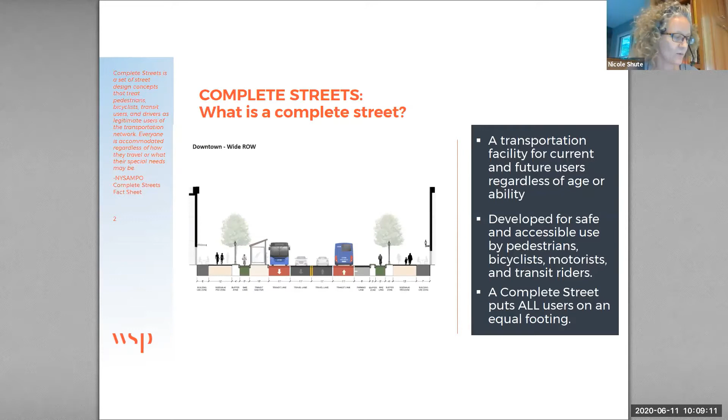So when did all this happen? Much of our recent engineering design practices has focused on the automobile. Complete Streets looks to put a higher emphasis on other modes of travel, particularly pedestrians and bicyclists, but also connectivity and access to mass transit users.

A quick Wikipedia search revealed that Oregon, go figure, enacted the first Complete Streets-like policy back in 1971. It sort of makes sense because we have long relied on the automobile, but in recent years the love of the car seems to have diminished somewhat.

Governor Cuomo signed the Complete Streets Act in August of 2011. It went into effect in February of 2012. Two years later, DOT issued the Complete Streets report, which synthesizes all the information they collected during their public outreach. It gives a reference to best practices, lists the design guidelines published through their DOT manuals, and gives a best practices outline.

Since this act was put into place, nearly 150 municipalities - towns, villages, cities - have gotten resolutions for incorporating Complete Streets policies into their projects, and 15 counties in New York State as well.

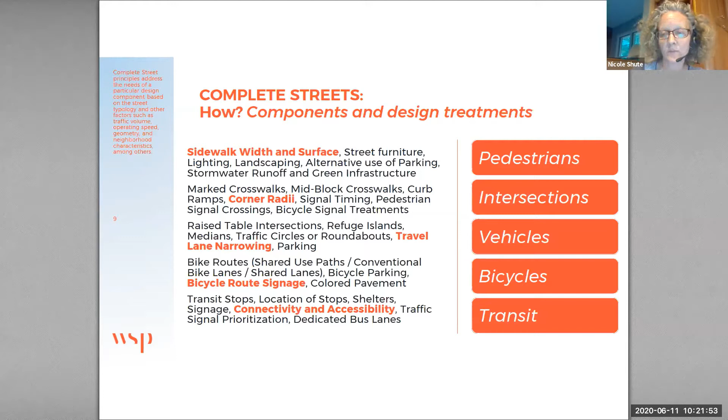For mass transit options, most of the design features have to do with amenities and the locations of the stops. Make sure they're in a location where users are available, and that the amenities provide an attractive space for users to wait for a bus or light rail. Connectivity is important across all components of a complete streets design. Dedicated bus lanes and signal prioritization also promote usage of mass transit through a quicker ride from point A to point B. So here are some project examples that WSP has worked on, or that I specifically have worked on.

Not to say this is a competing planning organization, but WSP Planning did work extensively with the City of Albany on the preparation of the Complete Streets Policy and Design Manual. This manual was developed to codify, to put into words, the design concepts for complete streets, and helps each municipality and project determine which concepts can be incorporated appropriately into their designs.

WSP was in charge of developing some street typologies and other concept designs. Once you take these typologies, which are a further description of a functional classification involving context, you can, based on geometry, speed, or neighborhood, apply one of the typologies to your project and select which complete streets aspects you can incorporate.

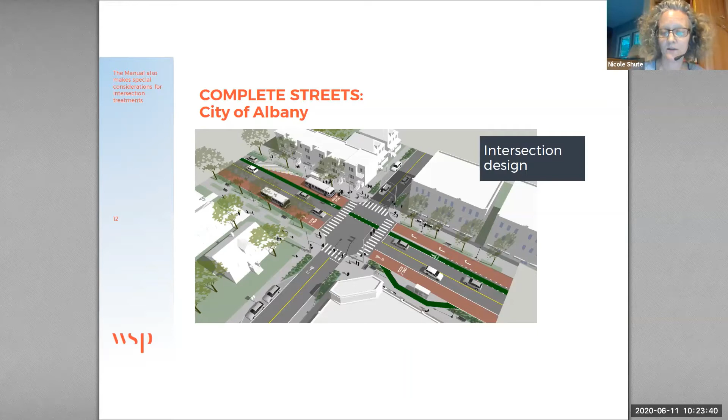WSP also assisted with the layout of some intersection design best policies. This particular slide depicts an intersection with a high bicycling and transit element. Although this is not a specific intersection, you can pull a lot of these elements into a typical intersection design.

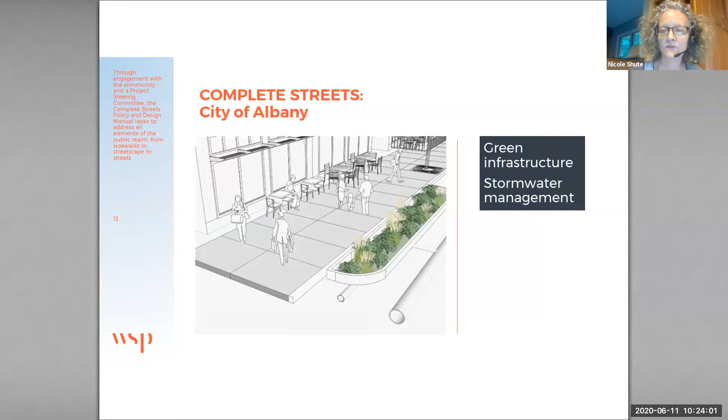Green infrastructure and stormwater management were a couple of other items incorporated into the policy. Green infrastructure for water quality treatment is important, as is keeping sidewalks and roadways free of ponding.

This is a project that my group worked on in the village of Sleepy Hollow. It wasn't a full Complete Streets project since the funding wasn't there, but they did want to incorporate a lot of their designs into some of the work that we did.

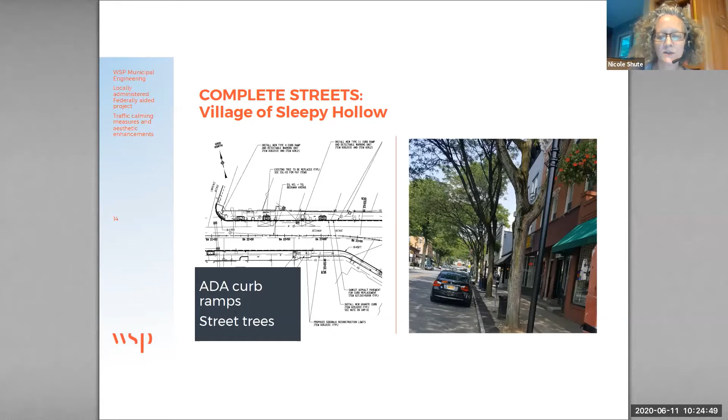The ADA curb ramps, many of them constructed quite a while ago, were not ADA compliant, so all of those were updated. New street furniture and new street trees were added just to enhance the area. It's a pretty walkable neighborhood with a lot of business frontage, and the sidewalks were all replaced so that the community can come back to a healthier and more aesthetically pleasing area.

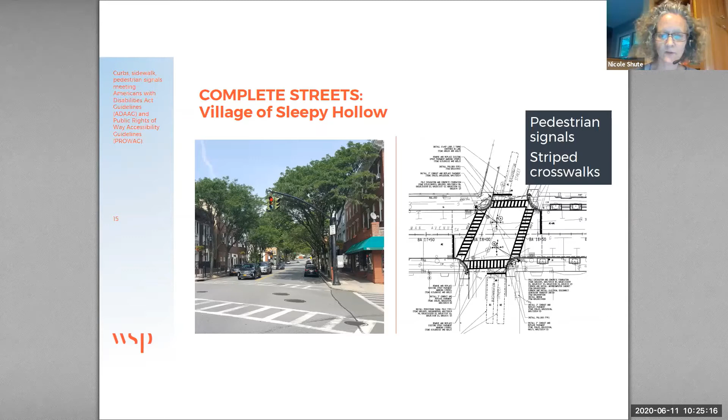The other location we did a lot of work on was the intersection. No pedestrian signals were in place before, and ADA compliance requires pedestrian signals, so they were incorporated, along with new crosswalks and new curb ramps for this project. More ADA compliance is an easy and simple way to improve accessibility on a lot of projects. This was a project in New Jersey with 13 signalized intersections and 165 ADA curb ramps. If nothing else, this is a good piece from Complete Streets to incorporate into almost any project.

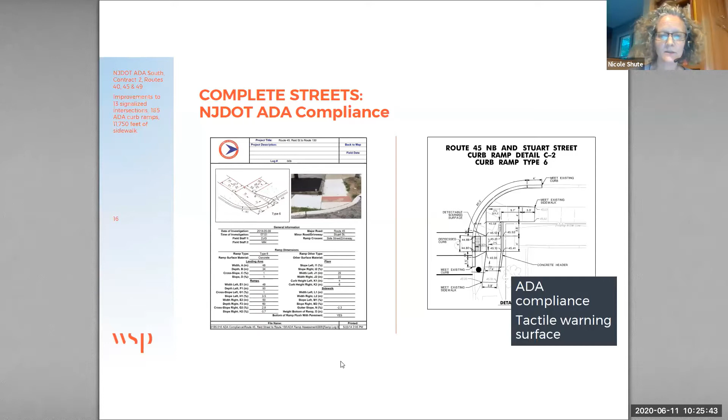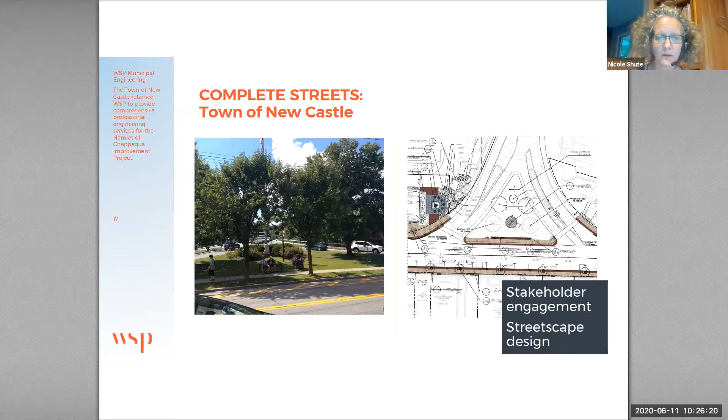Again, it's a village in Westchester County. It's walkable, with a lot of nice businesses, and improving their public spaces was important to them. This particular intersection had a high incidence of pedestrian-vehicle conflict, so pedestrian signals were implemented along with a new traffic light, plus additional public spaces for pedestrians to congregate.

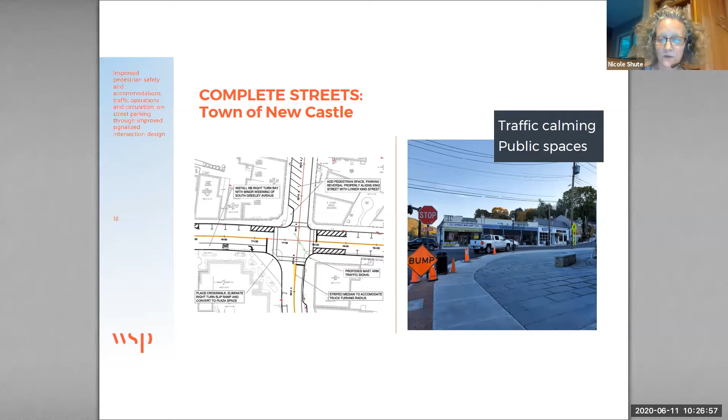And the traffic calming measures, there was some road narrowing through some bulb-outs and better turning radius for some of the larger vehicles. Just some pictures of the completed work.

We did incorporate some tree pits with biofiltration swales, pedestrian lighting, a lot of aesthetic enhancements. There were also a lot of other infrastructure improvements, including utilities and some uneven sidewalk work. In the end, this is one of our projects that we think turned out quite well as far as improving the communities.

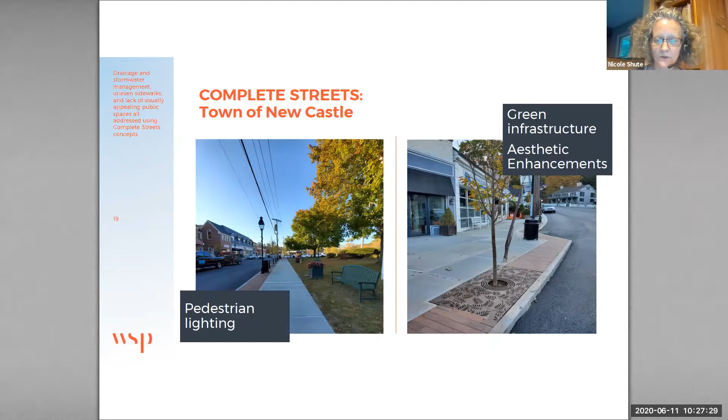Finally, just to talk about some of the larger agencies in which you can incorporate some limited scope elements from Complete Streets. This is from the George Washington Bridge. The ramp as it existed included stairs, which obviously are not able to be navigated by those of limited mobility. So this project included a ramp for shared use path, exclusive for bicyclists and pedestrians. Not to mention, it connects parks with residences, it connects parks with mass transit. There are a lot of nice pieces that can be incorporated into some of these larger agency projects.

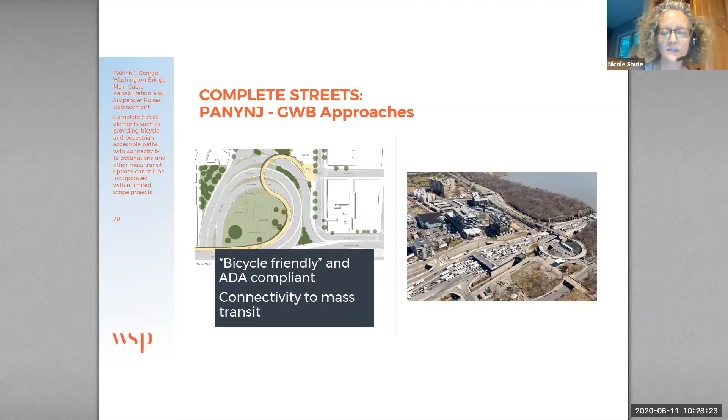I think I just want to turn it over to John, and he can talk about transit-oriented development, of which Complete Streets is kind of a nice piece. So here we go. Stop share.

Nicole, I just have one question here from the audience. Is there a speed limit for crosswalks for 4 to 5 lane highways? Sorry, there were a few extra words. You know, I don't know.

I do know that in order for a lot of the mitigation measures for crossing a 4 to 5 lane crosswalk, you can put in a median, and that can reduce the amount of time it takes to get from a safe spot to a safe spot. You can lengthen the pedestrian timing signal. I don't know about speed. The one instance I can think of where that came into play for me personally is in Yonkers, and we did do just that. The signal timing was so long because they had to cross the street through 4 to 5 lanes with no protected median. So we put that in, and that is one solution.

As far as speeds, I'm not sure about that. I could look it up though, and if you list that question, we could do some investigation. Great, thank you.

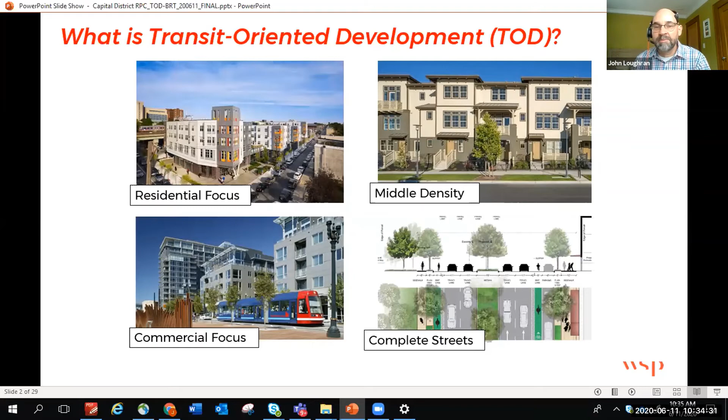So once again, this is all, to me, transit-oriented development. It's very customized to the location neighborhood, and it's not just about development, but it's about getting people that live there or could live there to the station.

Transit-oriented development can also increase property values. There's people that really want to be near transit and will pay a premium, but I think the whole concept of living in a pedestrian-scaled mixed-use community where you can get to transit is a draw - just the fact of a walkable mixed-use destination brings other people as well. Here's an example in northern New Jersey outside New York City where, when transit service and connections were improved, there was an average 5% increase in home sales prices in close proximity to the station, which is fairly impressive.

So TOD can promote walkability, and we heard about complete streets. The way that transit works best is you have a place to go to. We don't build transportation for the sake of transit, we build it to get someplace. So having a series of destinations at your transit stops creates walkable destinations, but also drives ridership. And here you can see some of the benefits, just a more positive view of the neighborhood.

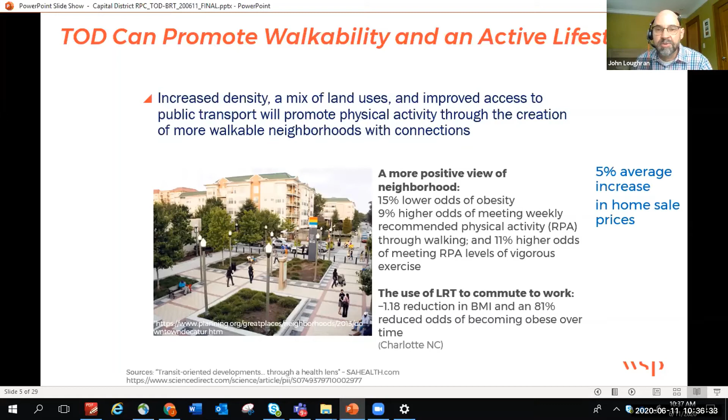I just want to point out too, besides walkability, it also improves resiliency. Because if for some reason you can't use your car - it's in the shop, you're an older person, a younger person - you've got that backup too. And I think the last few months you all learned the importance of resiliency in our planning.

So it also provides an opportunity to capture younger markets. We've all read that auto ownership is going down. Teens are actually driving this trend, young adults. There's the facts, but I hear this anecdotally from my Uber driver here in New York that their daughter or children doesn't drive. I also heard this at public meetings in Raleigh, North Carolina, in fairly suburban locations, that the younger generation just does not drive as much. They use Uber, they bike. It's more about getting someplace than driving someplace. And that's where transit comes in TOD.

So what makes TOD successful? I really start with the fact that transit-oriented development is anchored by transit, but it's really just the basic principles of really good neighborhood design. It's connected by transit, of course, but it's also walkable. The way that you get mixed uses that you can walk to is it's more focused development - not dispersed, it's more focused. Now that doesn't mean you can't have denser development at the station that drops off fairly quickly to lower density residential neighborhoods beyond, but it's definitely focused and diverse.

And I mean that in all aspects, right? It's multimodal - connected to transit, but also great ped and bike connections too. Increasingly, the first last mile is being handled by on-demand car services like Uber, and it's a diverse mix of uses. We're used to driving to our destinations, but if you're on transit, once you get off the train or bus, you want to be able to walk somewhere. So it's a diverse mix of uses as well. And finally, Nicole brought this up, and I'm going to reinforce it - although we're talking about transit-oriented development, it's really pedestrian-oriented.

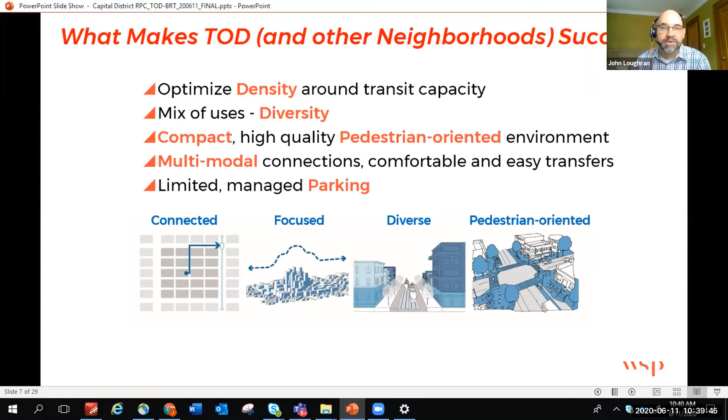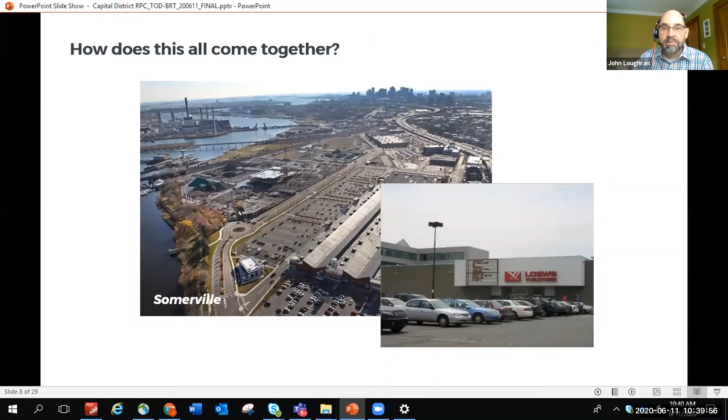So how does this all come together? This is Somerville outside Boston. This is actually near a commuter rail stop. And this was a former industrial site that had been redeveloped at some point as sort of big box car-oriented retail. And this is what it is today.

The elements that I'm going to be talking about are all evidence here. I'll talk about the infrastructure that you need to support transit-oriented development. But this is how it comes together: a mix of uses, denser than what's around it, but not terribly dense, and really just the place you want to be, whether you get there by bus, train, or just walk around the neighborhood.

So there's key elements, you know, if you're planning or you want transit-oriented development to happen, you really need to plan for it up front. It's really about understanding that if you don't plan for it up front and you put transit in and low density, auto-centric development happens, it's going to be many, many years before that redevelops.

And transit-oriented development and walkable, livable, mixed-use communities are so in demand that in many markets, once an agency commits to building transit, development will happen in advance of transit. Ideally, a developer is building a development that opens up when transit opens, not several years later. So that's why you got to plan for TOD with transit.

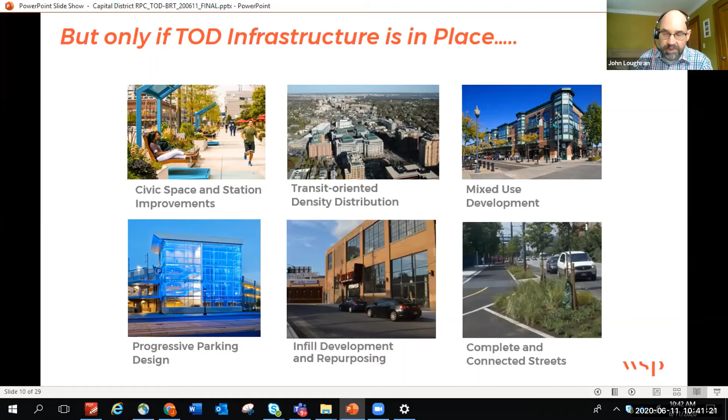So I'm going to talk a little bit about the infrastructure strategies that can really prime the pump, set the stage for transit-oriented development to happen. Of course, transit is one of them. But once you have that transit stop, what do you do? So there's two categories this falls into.

The first category is really multimodal connectivity. These are types of improvements that strengthen connections to transit. I can't emphasize enough the fact that historically, traditionally, we've designed transit as a standalone element. If you think about the heavy rail transit built in the 60s, 70s, 80s, BART in San Francisco, WMATA in Washington, D.C., they're full of these very suburban stations that even if they're in walkable neighborhoods, you have to drive to. A lot of highway stations too, they're just hard to get to. So the multimodal connectivity is very important for TOD to succeed and for transit to succeed.

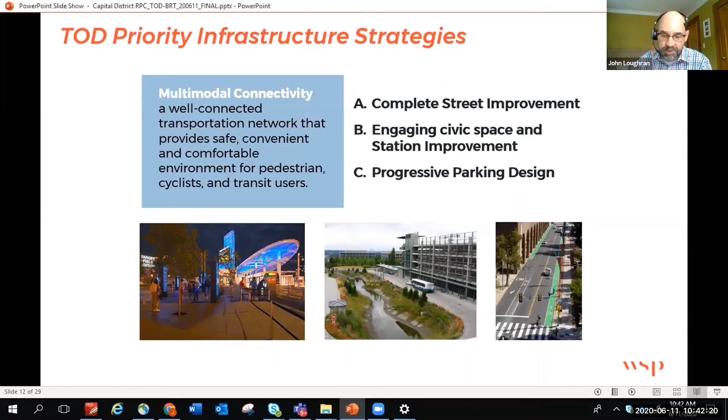And the second is really compact and mixed use development. There's a question about lower density development, and certainly TOD can be lower density, but what's also critical is the mix of uses. There's usually a use that predominates, a predominantly residential station, predominantly commercial station, but it's really about the mix of uses that create a complete destination at the station. So I'm going to talk about some of these strategies in greater detail.

So complete streets. We heard a lot about that, and it's not just about walkability and creating a place where people can walk, but it's a place where people can bike to the station. Perhaps there is a bus rapid transit connection that connects to a rail station, so you want to keep room for that. And it's really about streets that really reflect the neighborhoods that they're in. The way that we traditionally design streets is there's sort of one or two types to pick from, and they're all based on the car capacity.

And what you really want to understand, this goes back to what makes TOD successful: it's understanding what's unique about each community and really leveraging those assets, right? Whatever that asset is, open space, a great residential neighborhood already, sites that could be redeveloped. The same applies to the street network as well. You really want to identify what's unique about that and tailor your street network to the modes of transit, the pedestrian experience, and the development that's going to be supported.

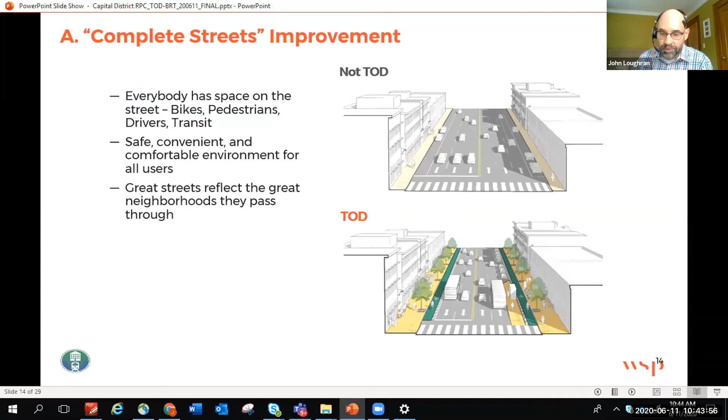We design everything as if we're in a car, even if it's downtown. The best example: you go to many walkable downtowns, and the signage on these retailers is six feet high by twenty feet long, because that's the way we put a highway sign up to attract a car. Well, people walking don't experience places that way.

So the public spaces around the stations and neighborhoods are so much more important—gateways for the station let people know you've arrived, and amenities for residents and workers matter more in a denser environment. One thing we learned with coronavirus is how important it is to have public spaces where we can get some distance from each other but still be in an active space. That shows the importance of public space—if you think about great spaces, you're usually associating a great city with its great public space.

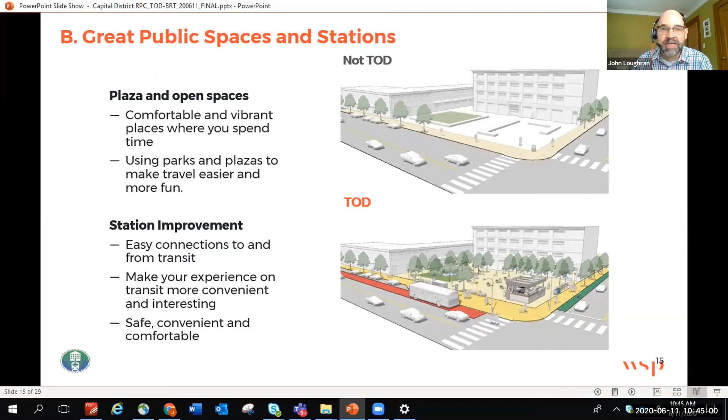So, prioritizing places over parking. There's a bit of a myth about transit-oriented development that nobody drives—really what you're doing is changing the mode share to prioritize transit. It gets people out of cars, they walk, but it doesn't eliminate parking entirely. If you're planning dense transit-oriented development, you're probably still parking quite a few cars as well as serving residents by transit, but it's how you deal with that parking. It doesn't matter how great a street is if there are five rows of parking between it and the building, so you want the building to respect the street and make the parking secondary—not unimportant, but handled comprehensively.

Maybe you reduce parking requirements because you're relying on transit, but it's also about concealing the parking, providing it where needed, and maybe bundling it. Often we get inefficient parking because every developer parks on their own parcel. So a strategy a city or agency can use is bundling parking for transit while including parking for adjacent uses, so developers aren't burdened with that. This spurs development and creates a better place.

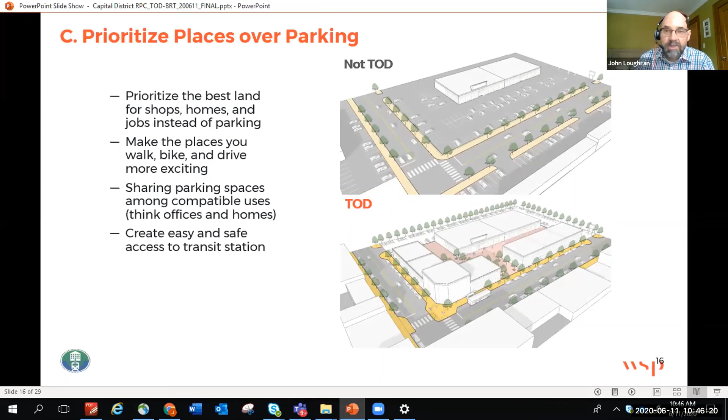Now I'll talk about mixed-use developments. Again, this goes back to designing our cities around the car, where we tend to have single-use destinations. Really successful transit-oriented development supports communities, and communities have a mix of uses and needs—the key is that they're walkable and connected. Typically we develop an office park, a retail shopping center, and housing separately; this is about bringing those together. Not that the entire neighborhood around the station needs to be mixed use, but it's about creating a destination right around the station with a mix of uses that supports real neighborhood interactions and makes walking much more interesting than a monoculture of uses.

So it's about being strategic about where you're growing. TOD needs to be customized to each station area, and part of that is having developable sites that can be densified near the station. Often I work in communities that have an area ripe for development, but you can't actually get to it from the station. So it's about having the densest development at the station and tapering back to lower-density neighborhoods.

This can happen fairly quickly—sometimes we don't realize how much density we could actually accommodate within a quarter mile to half a mile of a station. Just think about walking a quarter mile or half mile: if that area were densely developed, it's a pretty good node with a sizable amount of people. So once again, it's about growing near transit, not distant from transit.

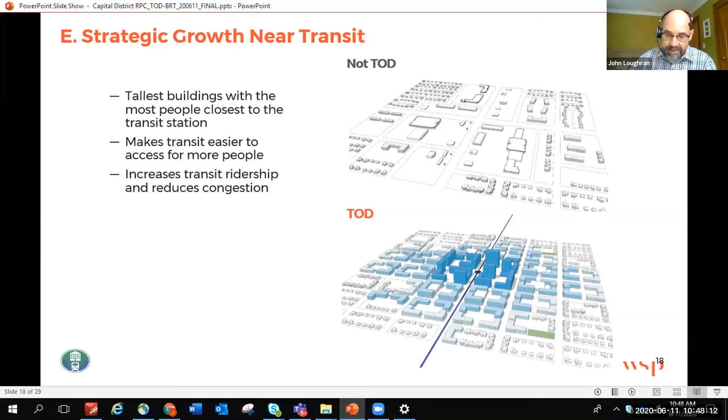Two benefits: sometimes those uses can get off the ground quicker. It's also a really good tool to change perceptions. Often, as part of planning for transit-oriented development, I'm meeting with the public, neighbors, and agencies, but I'm also meeting with the development community to find out what, from their perspective, will spur development. Sometimes once we meet with them, they walk away like, wow, there's actually more potential than I thought. So adaptive reuse can actually change perceptions of a community quicker than new development.

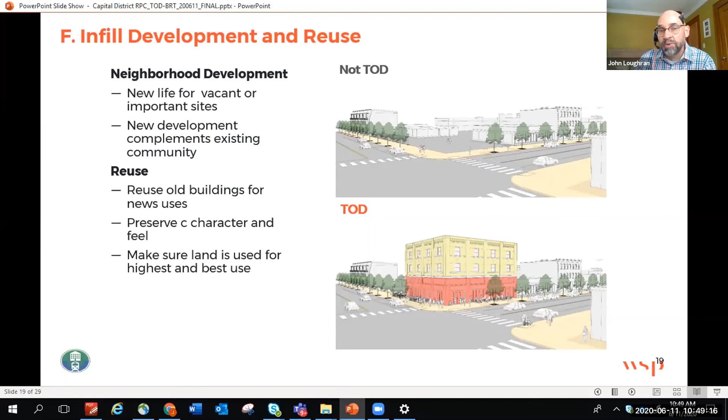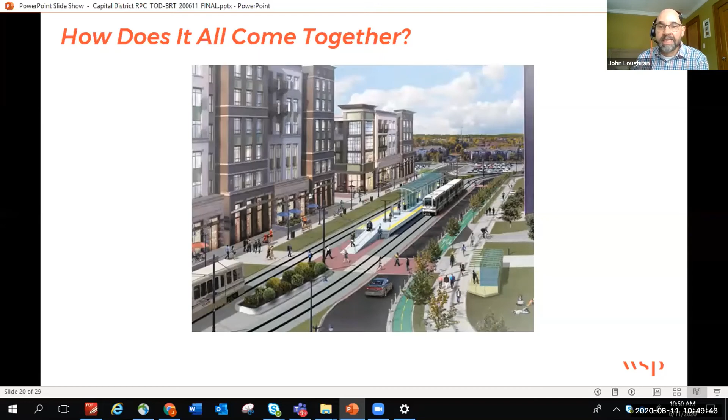So, finally, how does it all come together? This is an example in Buffalo, New York, where they're extending their light rail, one of the earliest examples of light rail in the US revival in the 80s. They're extending the system, planning for it, and you can see a lot of those strategies I just talked about for infrastructure implemented here: walkable, mixed use, open space. Once again, we're planning for this TOD in conjunction with planning the extension of the light rail, and that's how it should happen.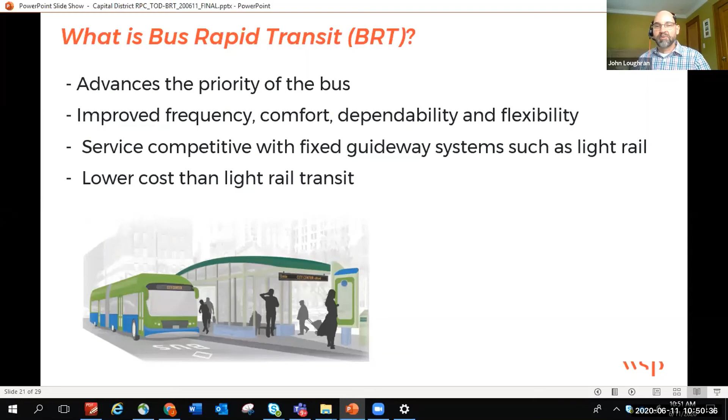So what about bus rapid transit? In Albany and the area around it, there are several bus rapid transit lines recently opened or underway. I'm assuming you're familiar with bus rapid transit, but basically it's a bus that prioritizes bus service: improved frequency, more comfortable buses, and dependable. One thing that separates bus rapid transit from light rail or heavy rail is flexibility. A bus rapid transit system can be in a fixed guideway for most of its alignment, and then go off and serve existing destinations. That gives it service competitive with fixed guideways, but at a much lower cost, which is why, as I said earlier, almost all of my TOD projects are now around bus rapid transit, not rail.

So bus rapid transit often has a dedicated running way, which is what gives it the service levels of rail, special vehicles, and an improved boarding experience. Their actual station is not just a stop on the side of the road.

And then there are strategies that just improve customer service and speed service. Often a real-time information kiosk—as a transit rider, sometimes it's not that I have to wait 10 minutes, it's that I don't know how long I have to wait. So real-time information, which we can do now. And then other strategies like off-board fare collection that speeds boarding and unloading. So often bus rapid transit makes up time in its schedule not by saving 5 or 10 minutes in one fell swoop, but by saving 30 seconds at a dozen locations.

So what's important about bus rapid transit and how it can spur transit-oriented development is really about providing high quality BRT. It's about investing in infrastructure and creating a brand that captures riders of choice. Often BRT is really just a nicer bus, but if you really want TOD to happen, it really should be a premium service.

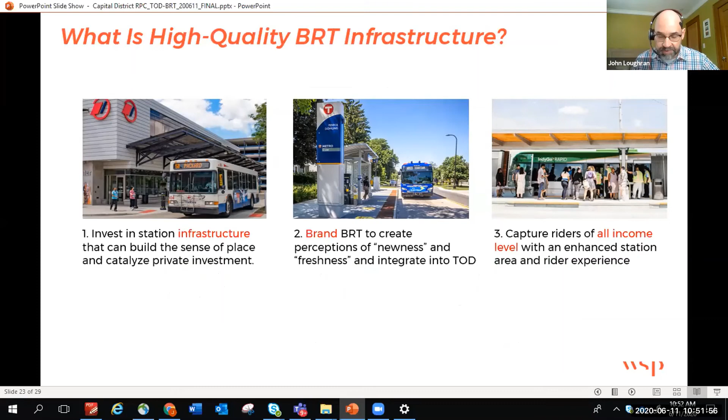As I mentioned earlier, one advantage I see to BRT TOD is that at a certain point, a bus can go off of its alignment to serve existing destinations, existing activity centers. Here are some more urban examples—I know in Albany it runs downtown as well. But in a suburban location, there's also an opportunity to serve existing office parks that a fixed guideway may not be able to serve, like a light rail. So BRT can be a catalyst for development. It is a catalyst for development.

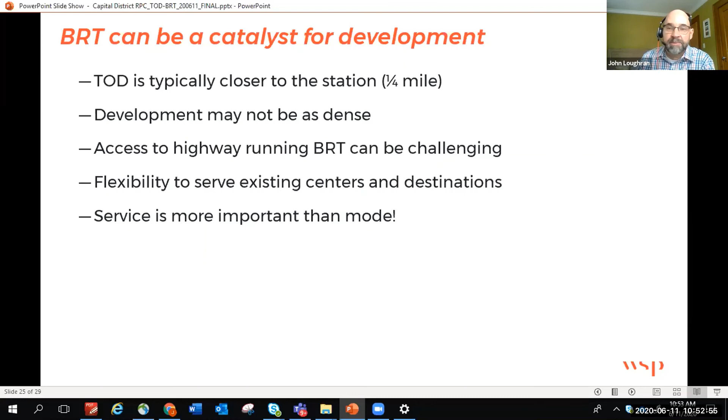A couple things are different about TOD when it's associated with the bus. Typically, the area that development happens is a little closer to the station. Development may not be quite as dense. Often BRT runs up a highway median, and of course, getting from the developable sites to the middle of a highway can be challenging. But the real takeaway here is that the level of service is really more important than the mode. If the bus comes every 10 minutes, people know it's coming, it's comfortable, and it gets you there quick—it'll spur development.

So here's an example in the Northeast. This is outside Hartford, CTfastrak, very successful. It really approximates a light rail service. It runs in a former freight right-of-way, so almost all of it is in a dedicated guideway, with really significant stations. This is an example of a vision for TOD build out where Hartford meets West Hartford, if you're familiar with the region, but development is happening. The upper right-hand corner isn't a rendering, it's an actual building that's constructed and occupied.

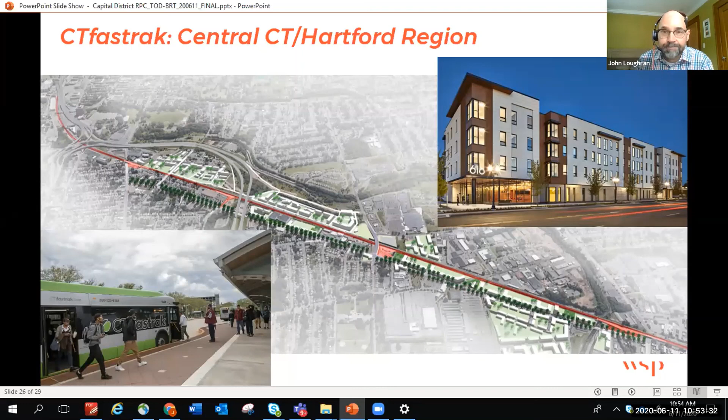So once again, how does all this come together? For BRT, just the same way it does for TOD. Plan for TOD up front, make the right infrastructure investments, be strategic about which stations you're planning for development, and it will happen. So that's it, thank you, and any questions, I'm happy to answer them.

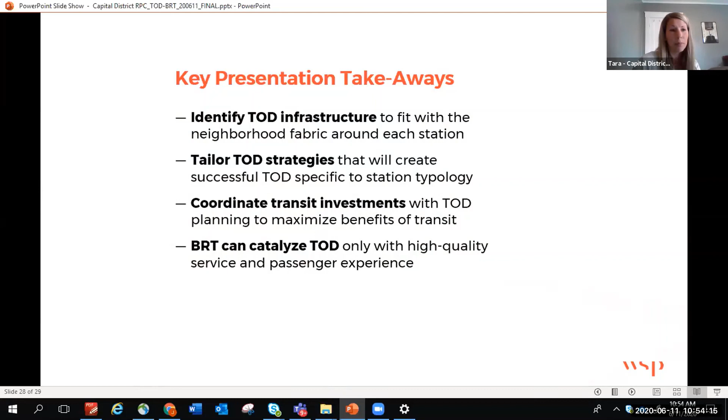So I do have a question, I guess this goes back to Nicole's presentation that's been sitting here for a little bit, so I want to make sure we get this answered. In the meanwhile, hopefully people can put some questions in for John. Let me read it as it is. As we know, the New York State DOT controls many of the highways where complete streets would be beneficial. The DOT is also very controlling when it comes to lowering speed limits when asked by municipalities. How do you overcome or work with this reality?

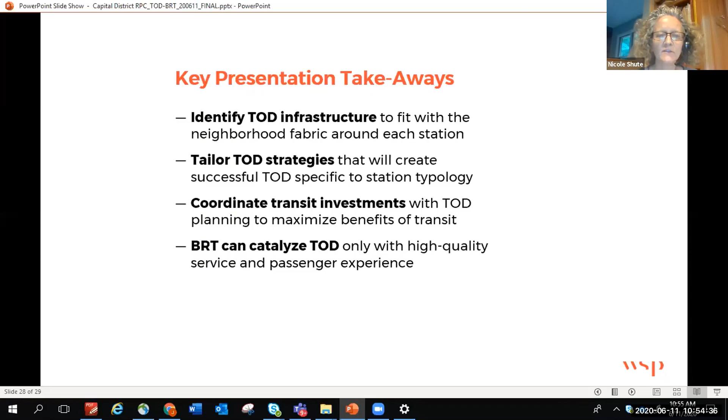I do know that speeds are an issue, especially if you want to create reduced lanes and a walkable, safe area. That being said, the DOT does have in their manuals design guidance for complete streets, and maybe just the typology is a different type than it would be obviously in a downtown area. I think some of the support that could be generated could come from the constituents, from lawmakers and community grassroots type stuff. If enough pressure is put on some of the powers that be, I think a lot of the more densely associated typologies with complete streets could be incorporated into some higher speed roadways.

But I think DOT isn't going to go out on a limb either. As much as I think their design guidelines do say yes, we are considering these options, I think there really does need to be some effort put in through the communities and municipalities to tell them, regardless of who owns this, we want a different system in place, and show them that either the need is there or the demand is there. In my limited opinion, I feel like that's really the key there to incorporating some of these.